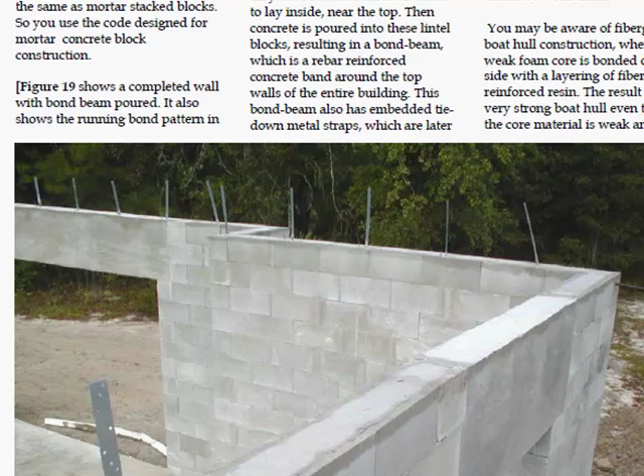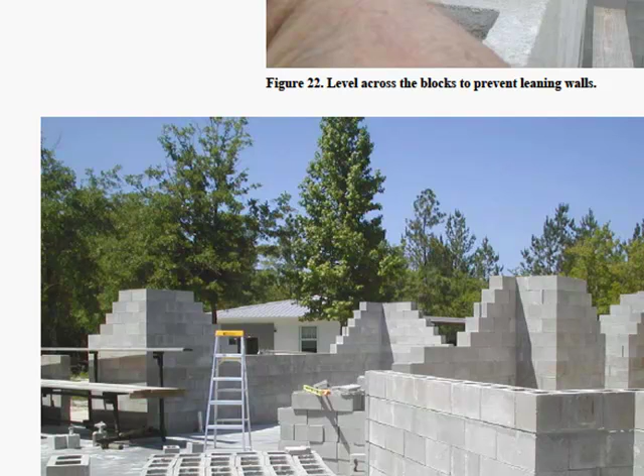This video is going to demonstrate dry stacked block construction issues when dealing with corners, and when dealing with outcrops and incrops in the wall.

Basically an outcrop is when the wall cuts in one block length here. That gives stability to the wall, since wind pressure can't push the wall across these two block lengths, making it very sturdy. If you have a long wall, you usually put one or more outcrops into it.

When you place an outcrop, you place it so the inside won't see it. So let's say this is a dining room here, this wall separates it from a bedroom over here - the room wouldn't see the outcrop unless you want it to, in which case you could do it that way too. That's what outcrops are about: adding strength to a concrete block wall.

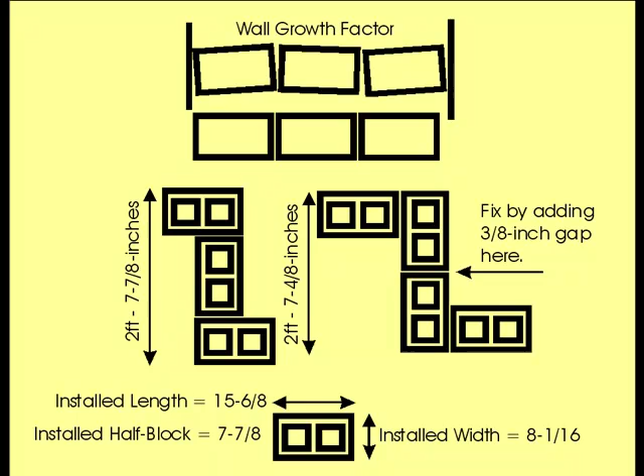Another issue to discuss is the difference between a physical 16 by 8 inch concrete block and an installed 16 by 8 inch concrete block. A concrete block is typically 15 and 5/8 inches, not 16 inches - they allow 3/8 inch for the mortar that goes between blocks. In our case, there is no mortar.

But we have two other issues here. You can never place two blocks so they exactly touch on all four corners - there's always a little slop you can't get rid of. So we add 1/16 of an inch per block to allow for that mating space. Up here we have a picture of the wall growth factor.

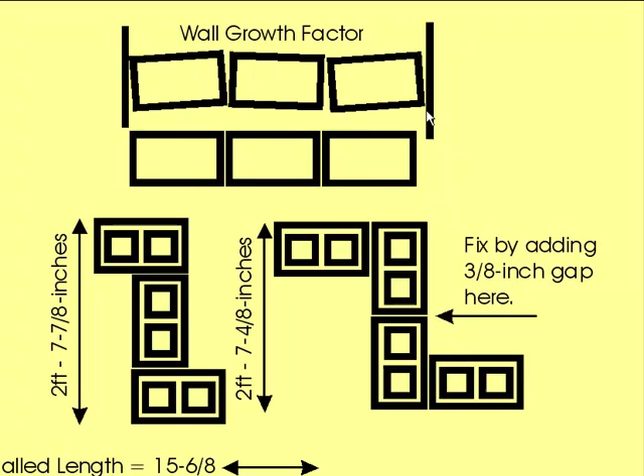As you stack blocks higher, they get more uneven due to block irregularities, and after about 7 rows the wall starts growing. If these are just barely touching at the tips, it becomes that much longer than the blocks at the bottom, which are set pretty much exactly level. To account for this wall growth factor, we add another 1/16 of an inch to each installed block length, giving a total installed block length of 15 and 6/8, or 3/4 inches.

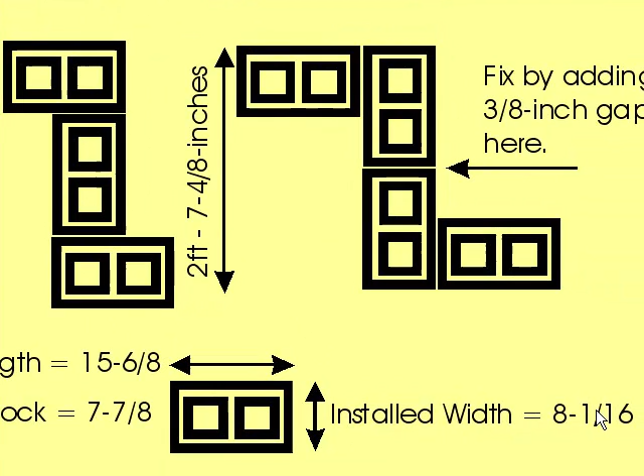In fact, you can't get two blocks to actually touch uniformly in all four corners. So when working on floor plans, an installed half block will be half of that number: 7 and 7/8 inches. The installed width of a block is 8 inches plus that 1/16, since there'll be something next to it - this width is considered 8 and 1/16 inches because we can't get them perfectly to touch. So now you have three installed dimensions to work with when dealing with dry stacked concrete blocks.

Now that we have that behind us, we can go back to our 3-block and 4-block configuration of an outcrop. When you add up the block lengths and widths, you get 2 foot 7 7/8 inches from the outside edge to the inside edge of this wall for this outcrop. If you measure the other block configuration, just two blocks in series, you get a different number: 2 foot 7 4/8 inches. So there's 3/8 of an inch difference between these two lengths.

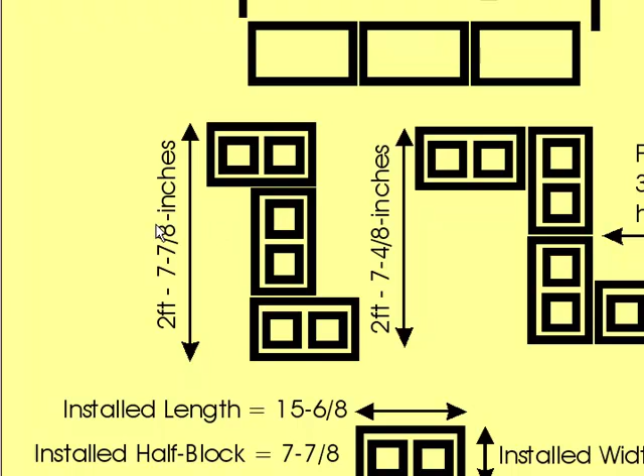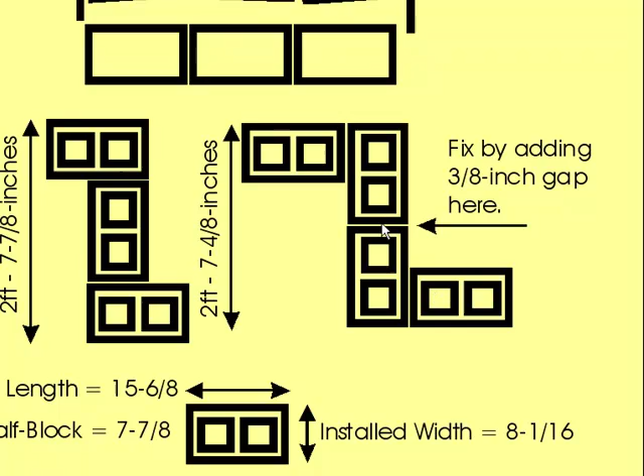So if this is your first row and you mortar it onto your foundation, you're fat, dumb, and happy, and you get ready to place the second row, you run into a problem because this length is 3/8 inch longer, so you can't fit them in. To solve that, you simply add a 3/8 gap between these two blocks when you place the first row and mortar it onto the foundation or footer. By adding that 3/8 gap, it makes these two numbers the same, so this block configuration will stack between the outside and inside edge of this wall.

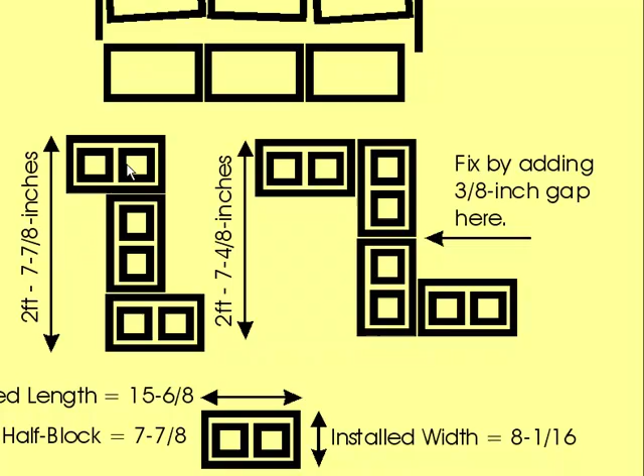But if you forget that 3/8, you're in deep trouble because you have 3/8 of an inch you can't fix. You cannot fix that transition. So the purpose of this video was to point out that these rows alternate. This might be row 1, 2, 3, 4, 5, 6, all the way up, or you could start with this as row 1, row 2, 3, 4. Anytime you start with this row as row 1, you better add the 3/8 of an inch, because if you don't, this configuration will not fit within the same space. Good luck with your project.

One more tip on these same issues has to do with a normal corner where this block isn't here, just a corner. Notice that the installed half block length is 7 7/8, but the installed width is 8 1/16 — that's 3/16 difference. So on your floor plans, if you want the wall to be a certain distance, you better throw in an extra amount, rounded off to the nearest 1/4 inch, to allow for this corner block.

If your wall corners like this, it won't come into play. But if it corners like this, you've got to add that 1/4 inch to the whole wall distance. Now most of us aren't worried about a 1/4 inch on a 30-foot wall, but we just throw it out there in case you were wondering, and in case you're trying to do very precise work. So good luck with your project.

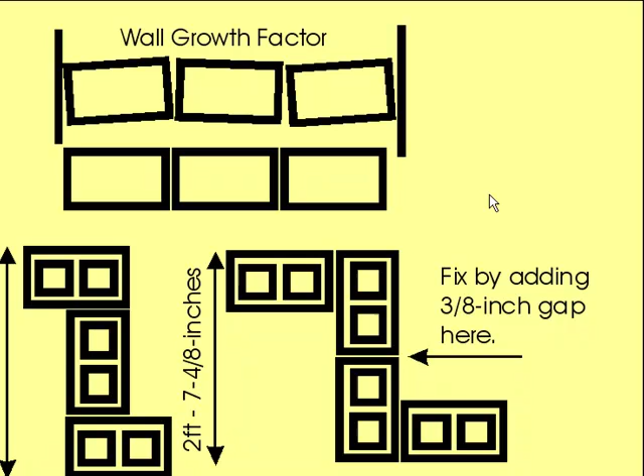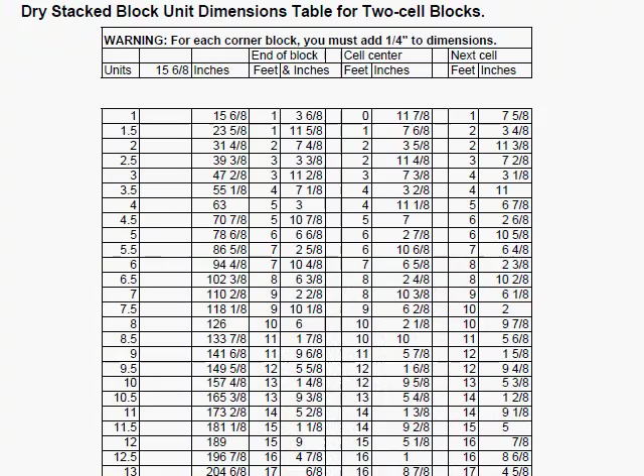One item we want to explain in the dry stack construction handbook is Appendix A. I'll scroll down here and bring up Appendix A. This is a spreadsheet table, and it's designed for people that want to build their home. It converts block units into wall dimensions.

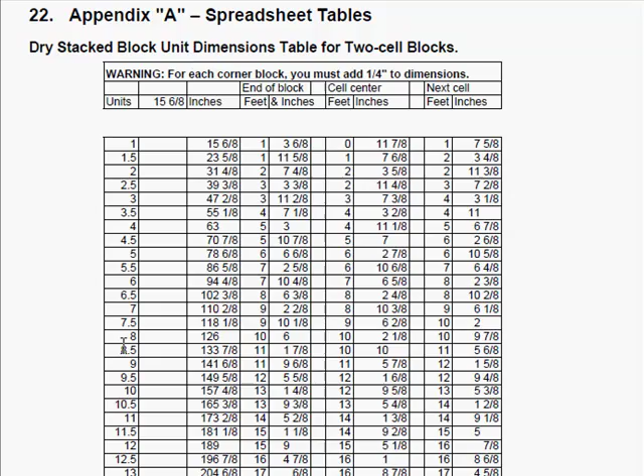Let's use an example: say we want to do a 24-foot wall. We look up 24 foot 3 3/8 is 18.5 blocks, and 18 blocks gives us 23 foot 7 4/8, so you have to pick one of those. You always want to use half block increments for any wall dimension, so you don't have to cut any blocks when you actually build the home. Once again, you must remember to add a 1/4 inch if you have a corner block involved in that wall segment.

While we're here, there are 3 information types: end of block, from the beginning of the wall to the end of the block, in feet and inches, and also just in inches. We have the cell center of the last block in feet and inches from the beginning of the wall, and then the next cell center, the first cell of the next block, in feet and inches from the beginning of the wall segment.

So if you want to put in your rebar about every 8 feet, with no windows or doors, come down here, like 7 foot 10 inches, 6 blocks, you'd throw in a rebar. That rebar would be 7 foot 6 5/8 inches from the beginning of that wall segment. This makes it real easy to place your rebar and determine the exact wall dimensions which support the half block increments.

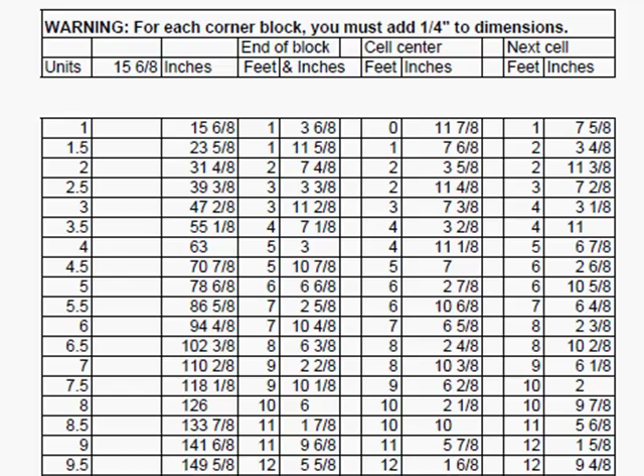So I just wanted you to be aware that we do have such a table in the book, and it makes your life so much easier when you're actually trying to design and build a house. So good luck with your project.